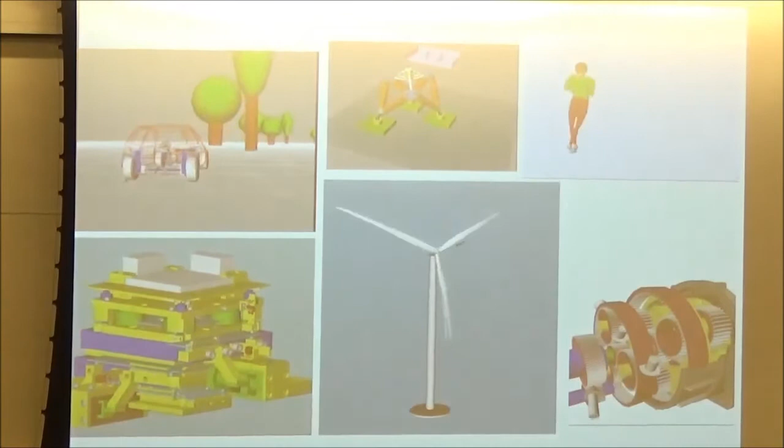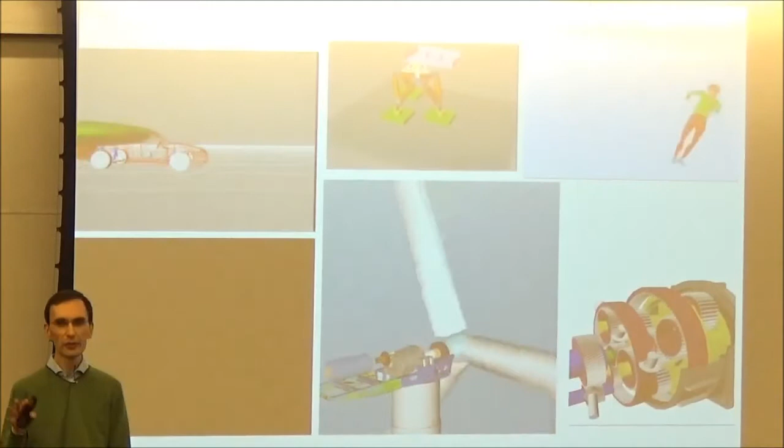Okay, and let's get started with this stuff. So essentially, just briefly about the background. So I actually started with what we call multibody dynamics. So dynamics has to do with forces and this kind of things. But if you want to do it really good, then it comes down to the very basics. And the basic is like motion, right? So it has to do with kinematics. So it turns out that even if you understand about the dynamics, which is, by the way, not easy, then still you have to do something good in kinematics.

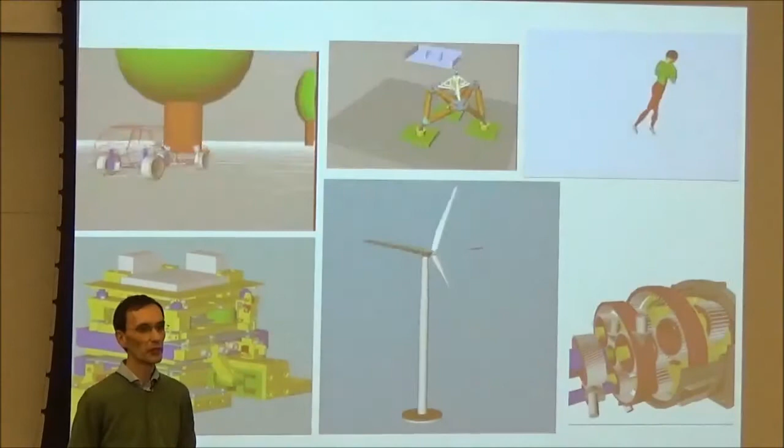So I actually came down to, converted, and I'm preaching kinematics. And it's all about things that you know. It's about rigid bodies in the simplest case, and also if you go a bit deeper into what happens in reality, then it's going to be flexible bodies. The human as a multibody system is a very good example for a system that comprises, of course, a rigid structure, but has this kind of what we call wobbling masses. Right? Wobbling masses including the fat and a bit of muscles and all this kind of thing, including the brain. So that makes it very interesting. But even if you stick with rigid body systems, it's quite a challenge.

Okay, so just a brief outline of my talk. I tried to group it into at least three main groups, which is about the Lie groups in kinematics of rigid bodies. So we are just looking at what has to do with one single rigid body. And then I would like to proceed with a chain of rigid bodies, a kinematic chain, an open kinematic chain. And then proceed going to the closed loop systems, right? So you remember this morning, I guess, there was a talk about closed loop systems, constraints, and so on.

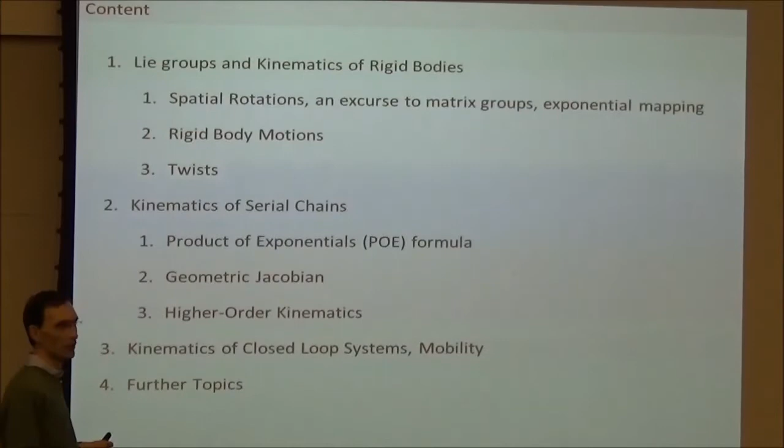The challenge actually of that talk is that if you just call it Lie groups in kinematics, this is an endless topic, of course. And I would just like to give you a bit of an introduction. And this is actually for more or less the beginner's level, or actually graduate students in the second year kind of thing. But still it is interesting.

Okay, let's start it. So this is probably the problem that Andreas was mentioning, that part of my slides get cut off. I'm not sure if we can do anything about it.

So if you look at what I'm talking about, I would like to talk about the Lie groups, and it turns out in a minute that this essentially has to do with screw theory. And I'm not sure if you, I wasn't here, if you talked about this. Actually, screws, they form an algebra, right, in a sense. So we have this kind of screw product, and this essentially means that we have a certain structure. The structure is essentially defining a Lie algebra, right?

And if you then, oh, it's getting smaller.

So if I would suggest some literature, okay, there's no way of getting it public. We have to go to the display board and change something. Okay. Good.

So if I was to propose, suggest some literature, I would of course refer to John Selig's book. That's a very nice introduction into, I don't know into what actually. He calls it Geometric Fundamentals of Robotics. It's a nice attempt to present what we need in kinematics and robotics in the framework of, I wouldn't say Lie groups, but in terms of a decent mathematical setting. And of course it has to do with Lie groups.

The other book that is getting kind of famous is the one by Murray and Sastry and Li, which is called A Mathematical Introduction to Robotic Manipulation. And they are planning actually a second edition. I'm not sure if this is going to happen. Of course, there are some interesting papers, and if you try to find the first paper that talked about Lie groups, or say Lie group formulation for kinematics of open chains, then you find, of course, the one by Bobrow and also Brockett. And the school that has to do also with that was Scott Ploen and of course Frank Park.

So, and if you look at the title, Coordinate Invariant Algorithms for the Dynamics, I think there's something more. Then you see that they are already talking about combining kinematics and dynamics. So they have been looking already at the dynamics formulation using Lie groups. Right? So we will see in a few minutes that actually Lie groups are just one way of looking at matrices, because essentially what we are looking at are matrix Lie groups. So it boils down more or less to two sets of matrices that are somehow connected by a mapping. This is the exponential mapping. So that's going to kind of give it the framework.

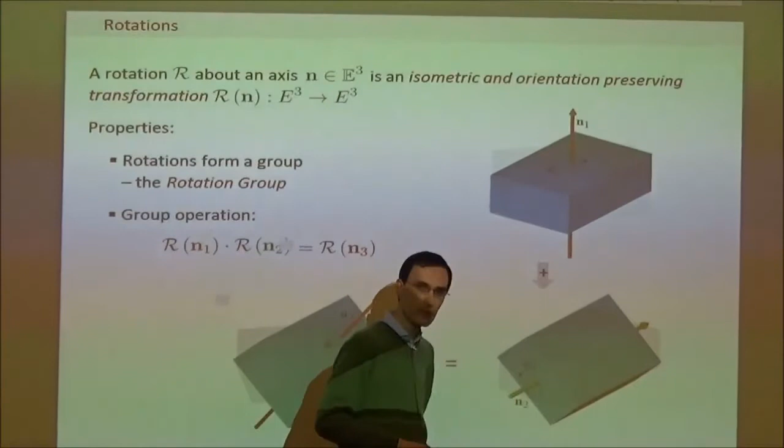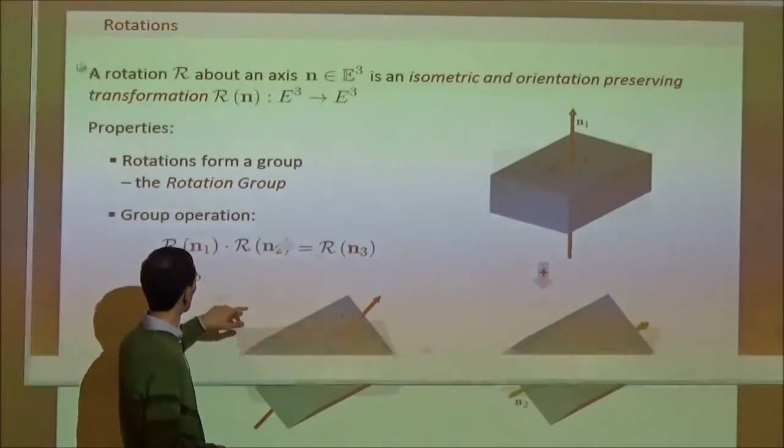Then of course I can combine this with a second angle. So I have the first rotation, I take what comes out, and then I rotate the configuration that comes out of here about a different axis, n2, and an angle phi2, and then I get a third angle and a third axis. And of course you know that there is a relation, and you can symbolically write that there is an axis n3 that gives you the same result as if you take n1 followed by n2.

What that means is that these rotations form something that is closed with respect to the application of the rotation. That means they form a group, right? Remember, a group is a set that is closed under multiplication. We have an identity and we have an inverse. So the identity rotation is of course no rotation, right? The inverse of a rotation is just the rotation about the same axis over the negative angle.

So we can try. Yeah, that's good. Well, we have 90%, that's good. Right, so we are here.

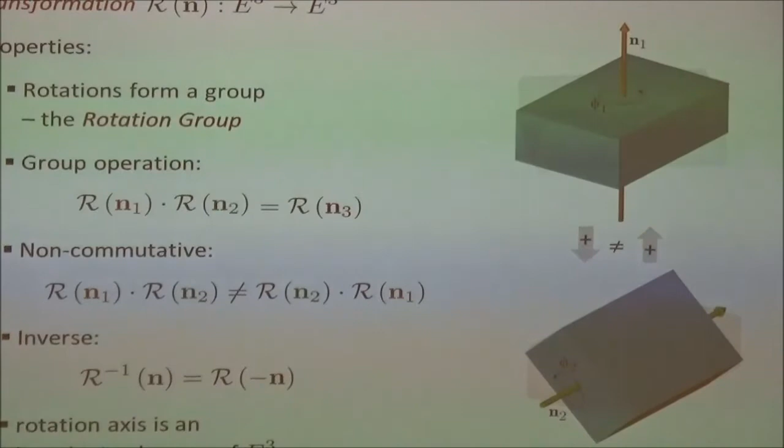But we know something more. We know that it's a group. We know, of course, that rotations do not commute. If I rotate about n1 and then about n2, it does not give you the same as if I rotate about n2 and then n1. So we have a non-commutative group. We have an inverse, of course, which is just the rotation about the negative axis. That's fine. We know something more.

We know that there is an invariant subspace. Actually, a rotation is a transformation, and it's an isometric and orientation preserving transformation of a Euclidean space. So if it is isometric, what I'm saying is, I fix 2 points on that body, right? Whatever rotation I'm performing, the distance between the 2 points of course remains, right?

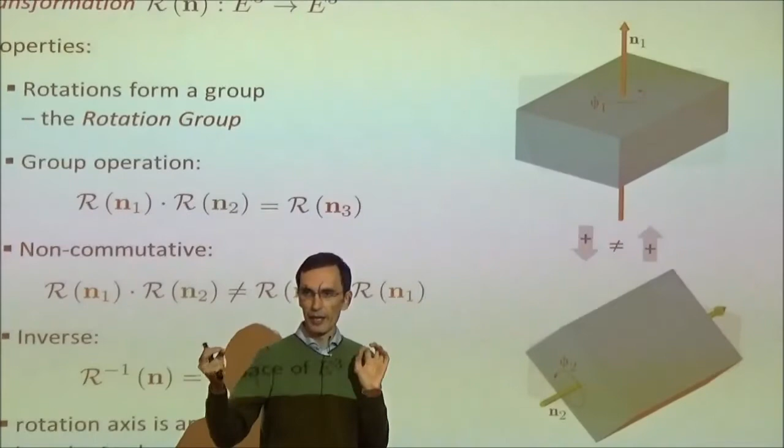This is isometric. The distance does not change. And also we have an orientation preservation property, which means that if I fix 3 points and make a right-handed coordinate frame, it stays a right-handed coordinate frame. It does not become a left-handed coordinate frame. So this is what it's all about. So, not very interesting maybe, but let's see what we can say.

We can of course represent rotations, and you know that we can use orthogonal matrices, right? Usually we call them just rotation matrices. And these are the 3 by 3 matrices with determinant +1. And because they represent rotations, they form a group, because the rotations form a group. So we have again another group, and this is what is normally called the special orthogonal group. And essentially this is one first example of a Lie group. We will see why this is a Lie group later on.

So SO(3). Remember, SO(3) is the special orthogonal group because we have an orthogonal matrix. It is special because it could be orthogonal even if the determinant were -1. It's special orthogonal because it's +1, right? So it's just the set of all the matrices that have determinant 1 and are orthogonal. And of course, this is what we know from algebra. These are rotation matrices.

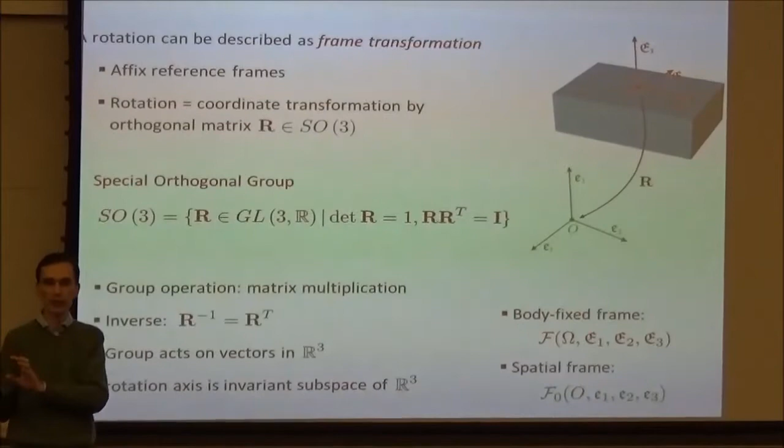The inverse is just the transpose, and of course there is an action, because these matrices act on vectors, right? You can multiply a matrix with a matrix, that's fine, so you have rotation after rotation. But you can also say I'm applying this rotation matrix to a vector, so I'm rotating the vector. So you see we have a group that acts on a vector space. This is one thing that has to do with Lie groups, because Lie groups are transformation groups. It transforms one vector into another vector. That is one thing that makes a Lie group.

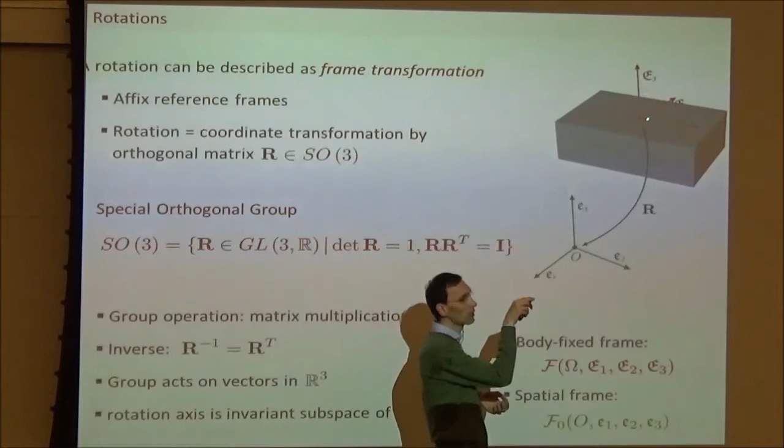And in our case, it takes coordinates from one frame into the coordinates of another frame, from the red into the green. Or the other way of saying it: we have a body-fixed point, and I express the coordinates of that body-fixed vector in the body-fixed frame, the red one. Then I'm transforming the point coordinates into the green one, maybe the space-fixed frame, just by multiplication with the rotation matrix.

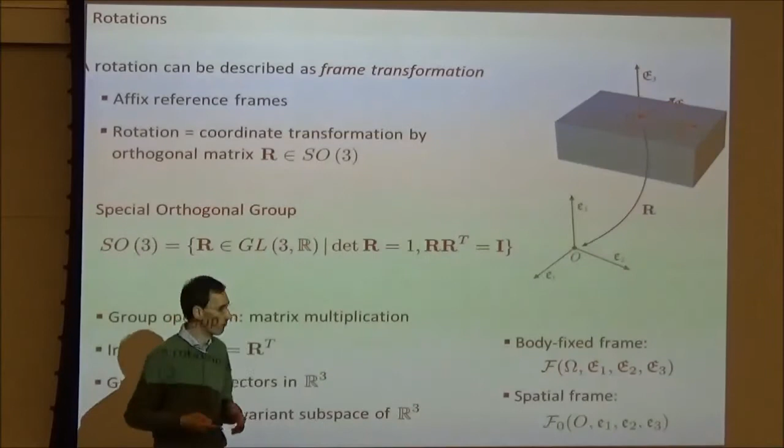But we know that there are many other ways of representing rotations, right? What about quaternions? There is what we call Hamilton quaternions. I mean, it's attributed to Hamilton, who knows. We represent this normally using the quaternion units i, j, k. And they have a certain multiplication law. If you square each of them, it's like the complex numbers, you get -1, and if you take i times j times k, you get -1. And if you combine this, you see that i times j gives k, j times k gives i, and so on.

Okay, and this defines something. Not yet a group, but at least something that is interesting. At least there is an addition, and the addition is component-wise. You add two quaternions component-wise. Then there's something called a multiplication, so you know how to combine quaternions. For whatever reason, it looks like this.

If you use the 4-vector representation, if you put all the 4 components in a vector, so you have the scalar and the vector part, then we can express the multiplication in this form. The scalar part is the inner product of the vector parts subtracted from the product of the scalar parts. And then we have this mixed part here, and this is what you know. So, fine. These are quaternions.

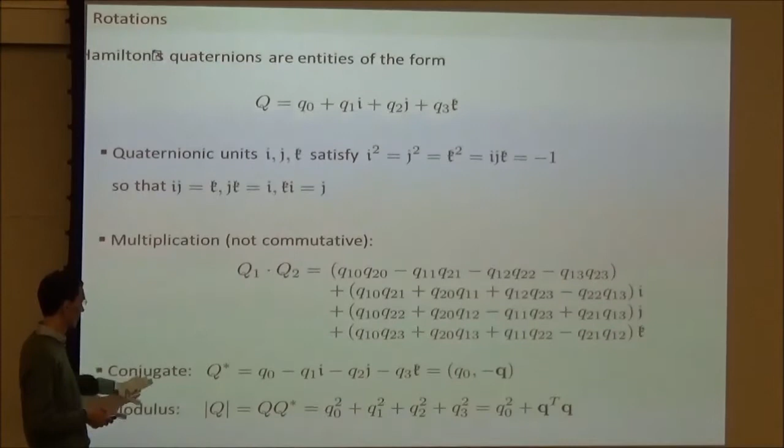And you might know that quaternions represent rotations again. So, I've said rotations form a group. If the quaternions are somehow equivalent to rotations because they describe rotations, then they should form a group, right? So there should be a group that is related to the quaternions. We have of course a conjugate, and we have the norm. So the quaternions do form a group, and this is sometimes called the unit quaternion group, symbolized with an H.

Maybe it's attributed to Hamilton. We have what? We have an identity, of course, because just the 1 is the identity, the scalar 1. Then we have inverse, taking the conjugate as an inverse. It's associative, and we have, that is important, the closure. The system is closed with respect to the multiplication, if you look at the unit quaternion, right?

So we have seen that we have then two representations of rotations. One is the special orthogonal group, that means like rotation matrices, and the other is the Hamilton quaternions. Just two representations of rotations. And this is the next step actually, what makes the Lie group, is that we can introduce some parameters, like angles and axes, right? Or Euler angles, which has 3 angles or something like that. And this means that we have a smooth parameterization of the groups. And this is what makes a Lie group.

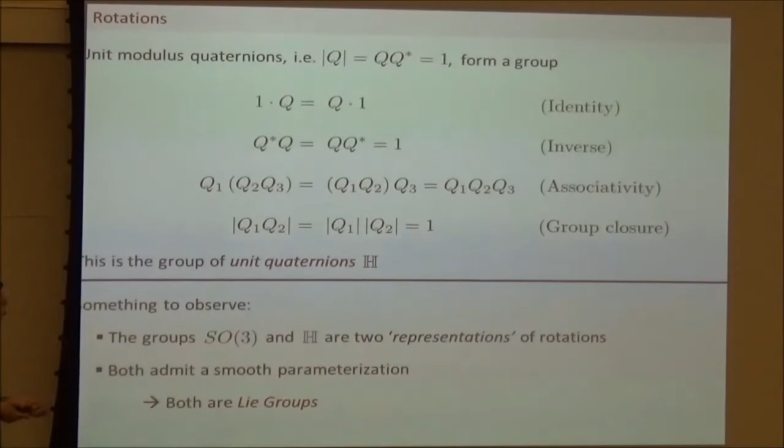Because a Lie group is a manifold. When I'm saying a manifold, it's something where it's possible to introduce smooth parameters, like angles, or like a chart on a surface, right? Like a smooth surface is a manifold. Why? Because you can introduce a chart, a local chart, and everything is fine. You have local parameters, everything is differentiable, it's smooth.

So, and now if this group is itself a manifold, so we can introduce more parameters that are continuously differentiable. And if G is a group, and if the multiplication exists, and the inverse exists, and is again smooth, then this is a Lie group. Well, this is the abstract definition. But if you look at the rotations, for example, it's clear that it's a Lie group because we can introduce parameters. The parameterization is differentiable. There's an inverse, and there's an identity, and of course we have some sort of associativity. Fine.

Are there any other good examples for Lie groups? What about the vector space Rn? If you take the n-dimensional vector space, that actually is a Lie group. Because we have a group multiplication, which in this case is just the addition of vectors. And of course the rotation group is not commutative, whereas the vector space is commutative.

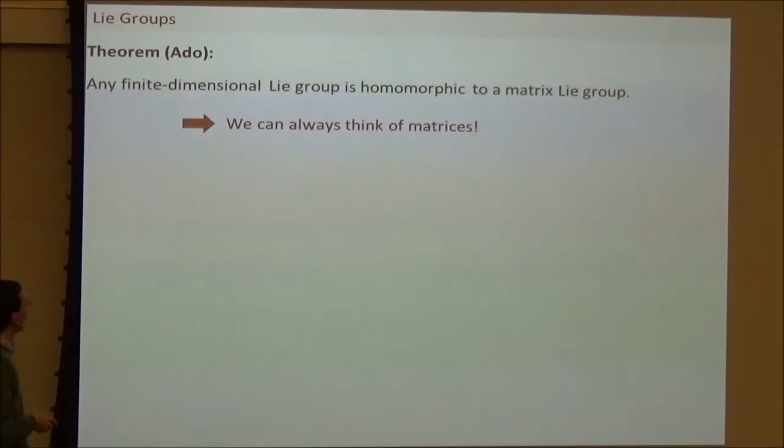And just as an example, look at Rn. The vector space Rn, with the addition, is a Lie group, as I was saying, because we have inverse, everything is very simple. But you can represent a vector in Rn as, actually, this is not correct, it should be n plus 1 matrices. So you have this n plus 1 matrix, where you have the identity matrix. So you have an n vector, right? We are talking about n vectors in Rn.

You take a vector u, components 1 to n. So you put this into this matrix, right? So you have the column vector here. Then you have the n by n identity matrix, and then you put the 1 in here. If you take two of them and multiply, u1 and u2, essentially what you get is, of course, the identity, 0, 1, and then here u1 plus u2. So it's a maybe a bit complicated way of representing the addition of two vectors. So this is one example that you can represent Rn as a matrix group, right?

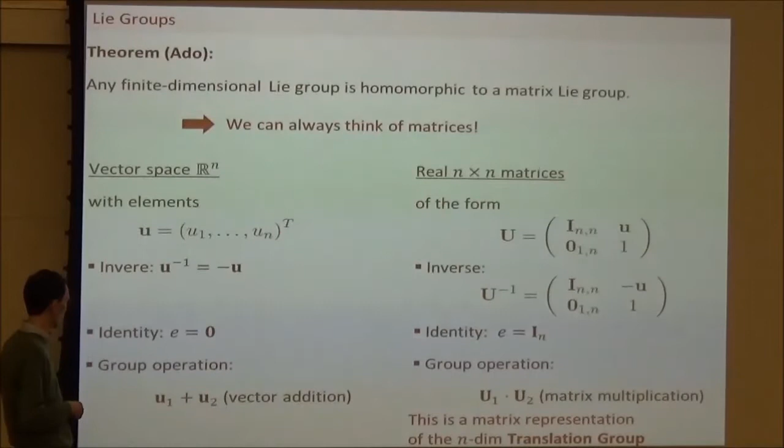Okay, good. What about now with kinematics? So far, there wasn't so much kinematics in here.

What we are going to do is to deal with the special orthogonal group first, because we are looking at rotations, right? And then we, of course, look at the full rigid body, because the rigid body motion has to do with translation and rotation, right? And not only the rotation. So we are going to look at what is normally known as homogeneous transformation groups, right?

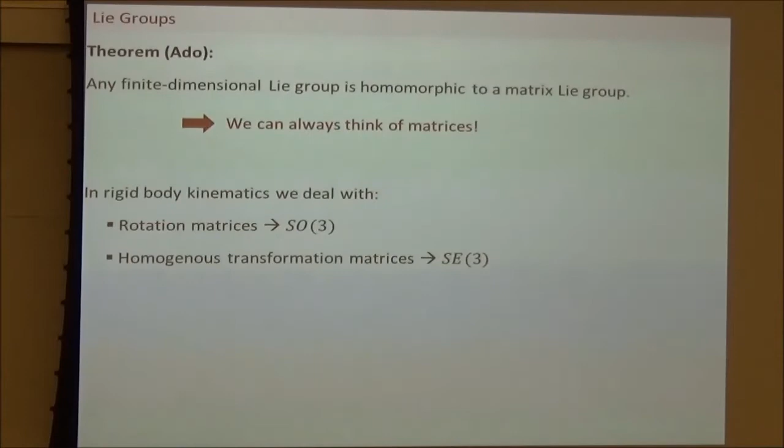Back to normal. Okay, so I was actually saying that to capture the full kinematics of rigid body, of course, we have to look at the rotation plus the translation, right? So slowly coming to a bit more of a kinematic viewpoint. Okay, let us look at what happens, for example, in a rigid body. So we have that interesting rigid body. Normally these are parallel lines. If I'm not mistaken, this is not parallel.

The projector is interesting. So let's say that we have a rigid body, and we have a fixed coordinate frame on a rigid body, right? The red one is fixed to the rigid body, and we have a space fixed. Could be space fixed? Maybe not. What is important is the relative motion, okay? So of course we have a displacement vector r, and we have a rotation matrix, capital R, right?

So what happens then, of course, if you have a fixed point on the body described in the body fixed frame, and we call the vector q. What happens then if we want to express this same point in the space fixed frame? Of course, you know what is going to happen. You have this kind of transformation, right? So you have to transform the vector q, because the vector q is represented in the body fixed frame, into the space fixed frame.

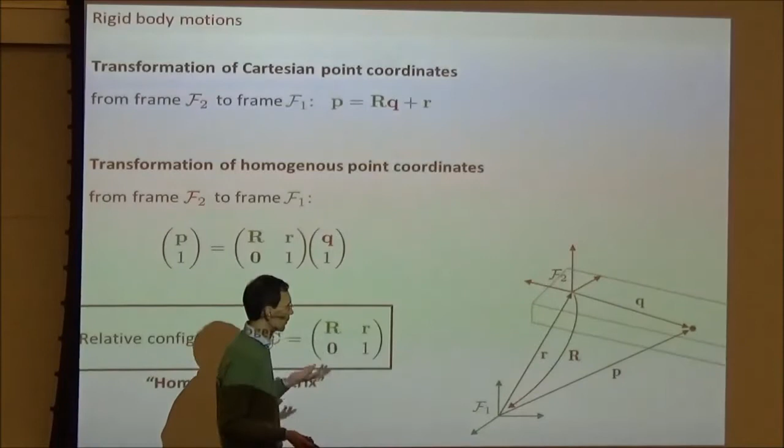And I can actually forget about the body, because kinematically a rigid body is just a frame, right? Because kinematically the rigid body is infinitely extended. Right, that's fine. Now if you multiply these matrices, of course they give you the same type of matrix. If you multiply such a matrix with another matrix, you get again a matrix that has a rotation matrix here, a 3 vector here, a 0 vector, and a 1. So that means we have at least something that is closed with respect to the multiplication.

So it's a group, again. But it's also a Lie group. Why? Because first of all we have an inverse, and the inverse looks like this. You just multiply and you see that that's correct. Then of course we know that we can introduce smooth parameters for the rotation matrix. This is what we said for the rotation matrices.

And of course we can introduce smooth parameters for the displacement by just taking the displacement itself as a coordinate. So we have a smooth parameterization, we have the inverse that is smooth, and we have closedness with respect to the multiplication. So we have again a Lie group, and this is what is normally called the special Euclidean group.

So why is it special? Well, it's special because we have the special orthogonal matrices in here. We have matrices R that are orthogonal, and they have to have determinant +1, right? And again, it's an isometric and orientation-preserving transformation of a Euclidean space, because we still have preservation of the distance, length, and also of the right-handed frame.

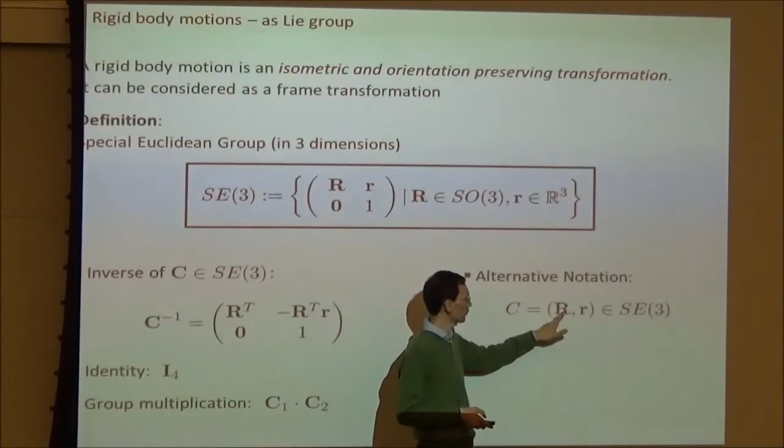I can just write, for example, the configuration of that particular frame, or the particular body, that we call C, bold letter C denoting the matrix, by just using C as the tuple of rotation matrix and position vector. So you can write the elements in this form.

Right, so what about now if I combine these frame transformations, one after the other? I have one frame transformation that transforms from F2 to F1, and I call this C12. I have a second one that transforms from F3, frame 3, to frame 2, and I call this C23. And if I combine them, I just have to multiply the matrices C12 and C23, and I get this one.

And of course you see what we get: one rotation after the other, multiplication of rotation matrices. But the position vector is a bit different. We have the first one plus the second one rotated by the first rotation matrix. That makes sense if you look at the meaning, because this one is expressed already in frame 1, whereas this one is expressed in F2, so we have to rotate. But there's a bit more interpretation behind this.

If you write the multiplication component-wise using these two tuples of the rotation matrix and the displacement vector, you see a bit of an asymmetry. The rotations get multiplied, whereas the displacements get summed up after half of it is multiplied. So what that means is that you don't have a direct product. If you had the rotations and translations as a direct product, it would just mean we multiply the first component and the second component, and that's it.

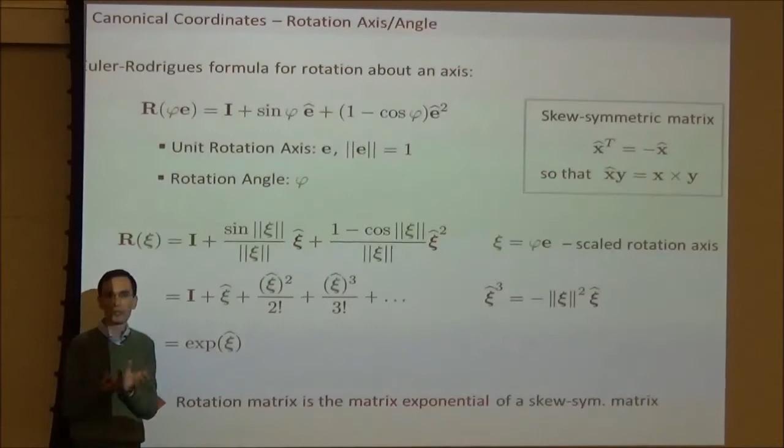Now, and this is a claim, I didn't prove it, for any rotation matrix we can find such a vector that we can express it in terms of the exponential. So we can express all these matrices in terms of exponential skew-symmetric matrices. So you see there's a one-to-one correspondence between the skew-symmetric matrices and the orthogonal matrices. And also, we can interpret these vectors that we put into the skew-symmetric matrix, a vector consisting of 3 components, as the rotation parameters. So we have 3 independent rotation parameters.

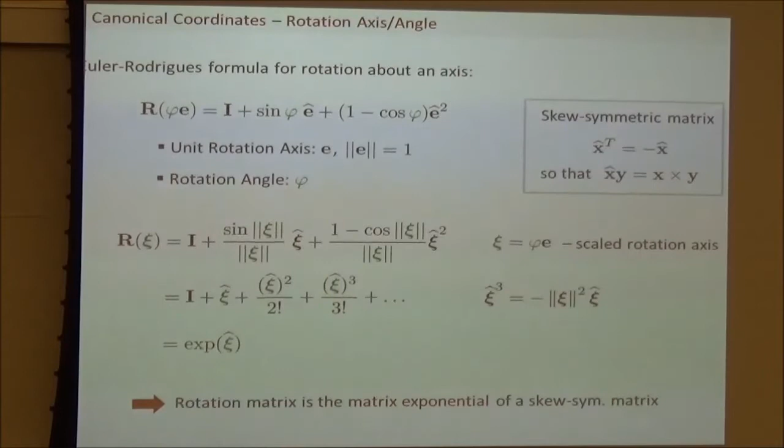And this is the parameterization and the smooth parameterization of rotations. You see, and this is what we have here. And then we call these skew-symmetric matrices, because they are somehow related to the group, right? The group has been capital SO(3), the special orthogonal group. By tradition, that set that is now called the Lie algebra, that generates a group via the exponential mapping, is just denoted with the small letters. So we have a small so(3).

So what we have is the first account of a group and the corresponding algebra. Right? So we have a Lie group and we have a Lie algebra. And the connection is the exponential mapping. Of course you can ask, what is the inverse? Yes, correct, there is a logarithm, but forget about this, it's not so important. Anyway, the so(3) in this case is just a set of skew-symmetric matrices, right? That means if you take the transpose, that is minus the matrix.

Okay, so that is something that leads us to the definition of a Lie algebra. And there are some quotes in here. This is a quote-unquote definition. It's not totally strict at the minute. A Lie algebra is just a vector space. So why am I saying vector space? Because of course these skew-symmetric matrices are a vector space, right? I can add them together. Whenever I add 2 skew-symmetric matrices, I get a skew-symmetric matrix, right? So it's a vector space.

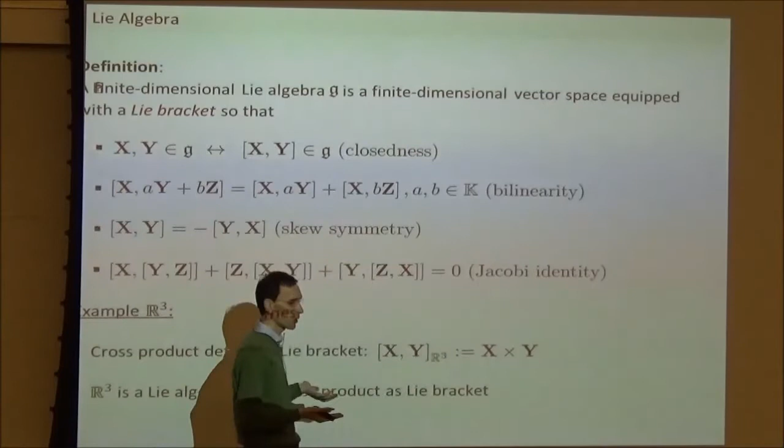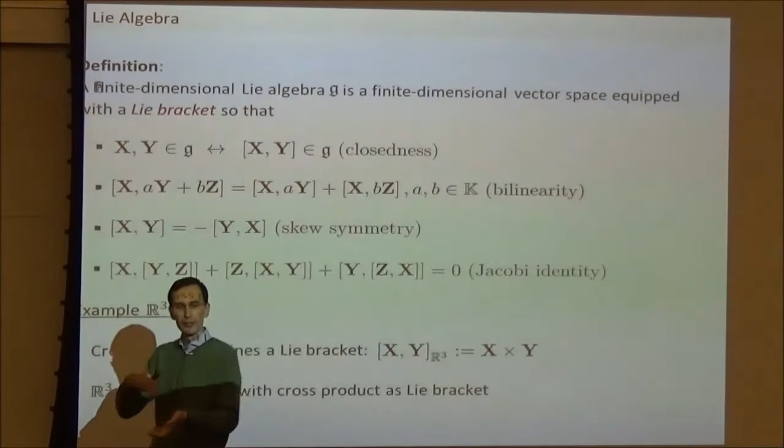And there's something that's called the Jacobi identity. So you know all this already because you know about R3, the vector space of real vectors in 3 dimensions, and you know there is a cross product. If you take 2 vectors in R3 and take the cross product, what you get is a vector in R3. So it's closed, right? It is, of course, skew-symmetric. If you take the cross product of x and y and interchange them, it gives you the negative, right? So we can say that R3 is a Lie algebra with a cross product.

And there's one thing to observe. If you take this skew-symmetric matrix, right? Start here. If you take the cross product of x and y, and you construct the skew-symmetric matrix of the vector that you get out of it, this is exactly the same as if I take the skew-symmetric matrices of x and y, minus y and x. So you see, this is a different way of representing the cross product.

But now I can go one step further, because I know that these skew-symmetric matrices themselves form a Lie algebra, which is the one that we call so(3), right? So that means there is, again, a one-to-one correspondence of the cross product and something that has to do with the skew-symmetric matrices. And this is what we call the Lie bracket in so(3). It's just defined as the matrix commutator.

So, good. I would like to come to an end here, and come to the last slide on the mathematics before I finally come to the kinematics. Just something about the matrix exponential. A matrix exponential is very simple. You take the series expansion of an exponential function and you just plug in a matrix.

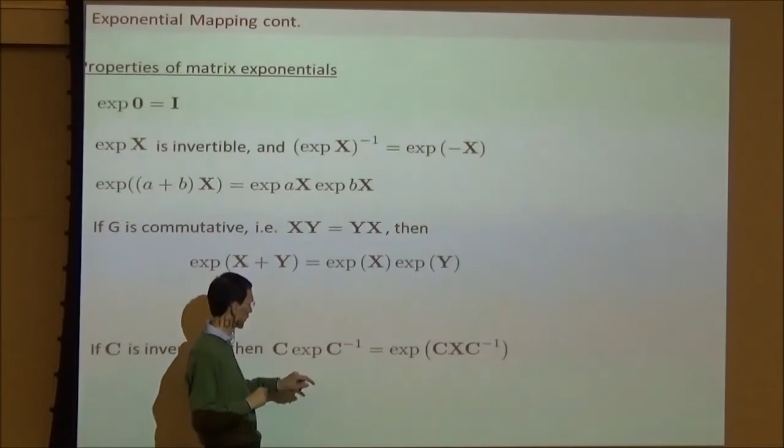What is important is this property. If you take the exponential of x and you multiply it from the left with the matrix C, which is invertible, and with the inverse of C from the right, then this is the same like taking the exponential of x left multiplied with C and right multiplied with the inverse of C. We're going to use this later.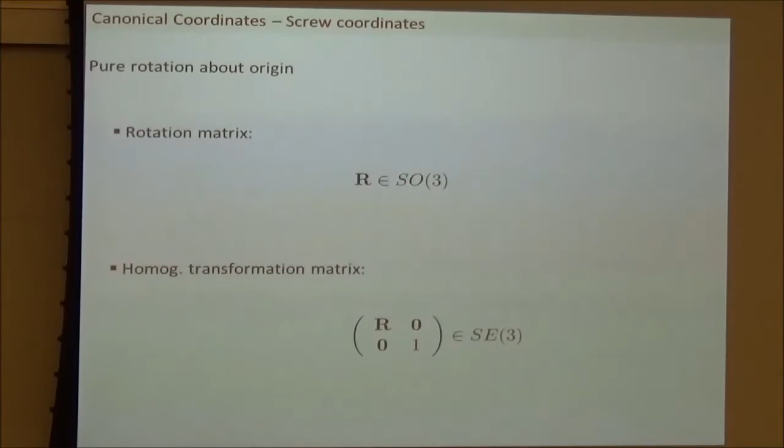Okay, so let's come back to the rotations. So I was saying that we can represent the rotation by using a rotation matrix, SO(3). Well, probably I can do the same by just saying I use my homogeneous transformation matrix, and I have no translation vector there. That gives me the pure rotation again, right? So that is probably equivalent. I make no mistake by using either one.

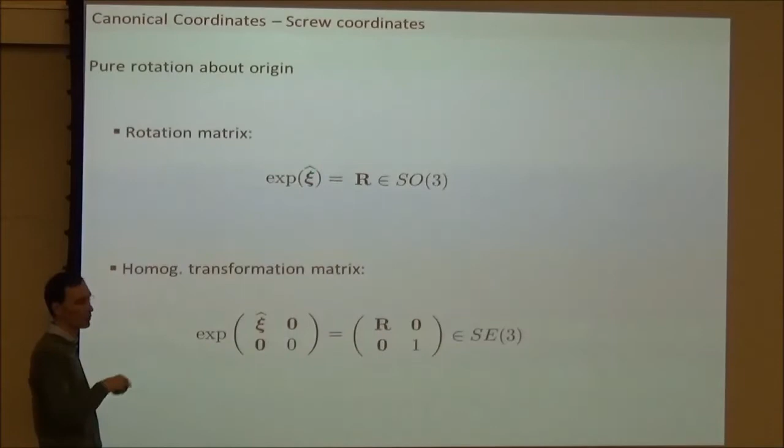So I know, that's what we said already, that I can generate this rotation matrix by using a skew-symmetric matrix. I take the exponential of it. Well, I can do the same here. If I put this matrix into my matrix exponential, the zero does not have any effect. I get actually my rotation matrix here, and everything is fine. So I take the exponential of the 4 by 4 matrix, and it only has the non-zero term here, which is the exponential of my skew-symmetric matrix.

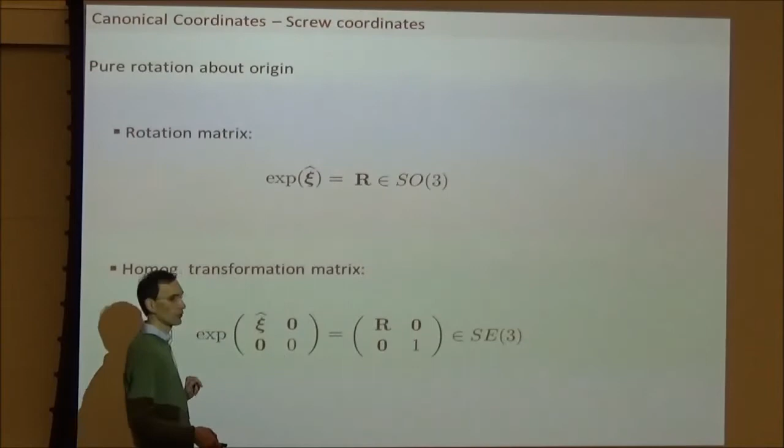Why is this important? Well, let's see how this can be generalized. We know there is a theorem that's called Chasles' theorem, or sometimes called Mozzi's theorem, which claims that any rigid body motion can be represented as a screw motion. So for any rigid body displacement, we can find an axis, a so-called screw axis, so that the rigid body motion that takes a body from the initial to the final configuration is a rotation about this screw axis and a translation along it. And this is what we call a screw motion, because it behaves like a screw.

It has a pitch. So let's see what happens if we do the screw motion, and we fix our reference frame of the body so that its origin is actually on the screw axis. This is why I was needing this kind of formulation here. So what I get, of course, is the rotation matrix, the exponential of my skew-symmetric matrix that gives me the rotation.

And I know exactly what the displacement is, because since the origin is on the screw axis, it is just the vector xi along the screw axis times the pitch h, which gives me the displacement. So this is correct. Without any further consideration, this is my screw motion that I get if I position my reference frame on the screw axis.

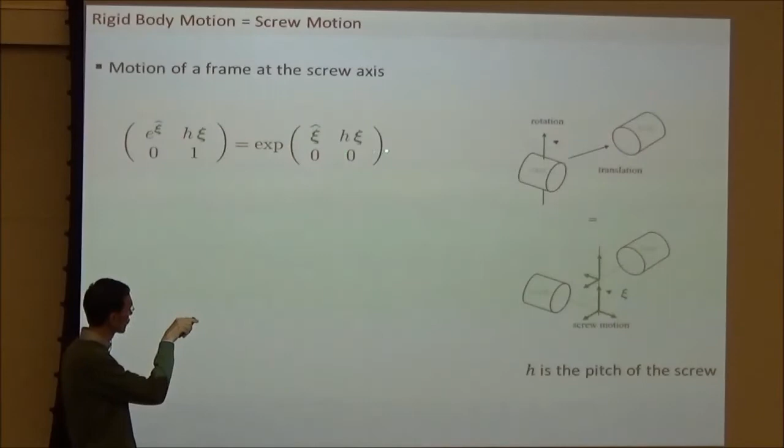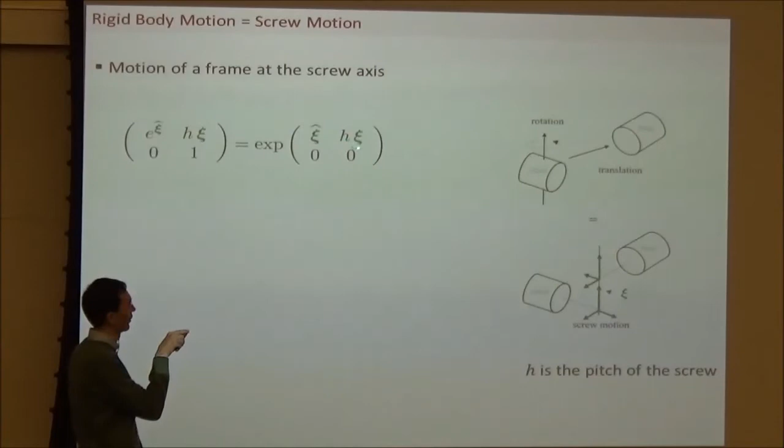And this is the same like saying I take the exponential of the matrix consisting of xi hat and h xi. Because if I use the expansion of the exponential, I get this to the power of 1, of 2, and so on, and the only thing that remains is h times xi. And here we get the full exponential. So that gives me a way of representing the screw motion as long as my reference frames are on the screw axis.

Well, what this means, look, this is just obvious how we can describe this, because what I'm doing is here we have a frame transformation from the red one, the initial one, to the one on the screw axis that I used before to describe the rigid body motion. And then I have the one that transforms back to the red one. This is the inverse, of course, and this is, of course, just a frame transformation.

And I can just multiply this, and I can then use my properties that I know. I multiply this out, and find that, of course, R times e^xi hat times R transpose, this goes in here, and the rest gives me this. And that's pretty simple. And then I use the property that I was mentioning, that if I multiply from the left with a regular matrix and with the inverse from the right side, I can raise this into the exponential, into the argument of the exponential mapping.

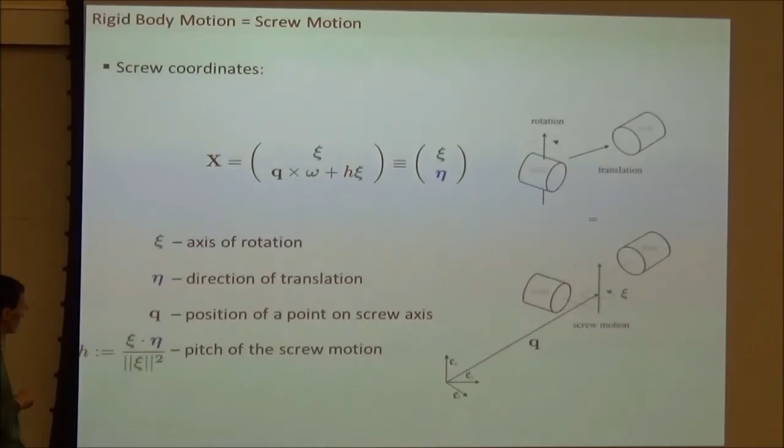And of course, how do you construct it? Just to repeat it, you have the screw motion corresponding to motion about the screw axis. You take the axis xi, and then you take a displacement vector q. The cross product goes in here. The first is the angular part, the second one is the linear part, and then you have your screw coordinates, and this goes then into the exponential.

Now we have like 3 steps at the moment. We have first of all the screw axis, then we construct this 4 by 4 matrix, this one here, that goes into the exponential mapping, right? So you might call this x hat again. So we take xi hat, and then we take this eta that we just defined as the cross product, and then this goes into the exponential mapping. Well, why not give it a name? Why don't we name all these 4 by 4 matrices with this skew-symmetric matrix and the linear vector here.

Why don't we call this se3, as we did for the rotations, for the so3? You can just say, well, this is actually a vector space, right? If you take the sum of it, you get the same sort of matrices. But this is the one that gives you the SE3 matrices, the homogeneous transformation matrices, by means of an exponential mapping, which was kind of the definition of the Lie algebra. So essentially what I'm saying is we have now the Lie algebra to the Lie group of rigid body motions, right?

I was saying that the Lie algebra has properties, and one is an operation which is called the Lie bracket. Again, in this case, the Lie bracket is just the matrix commutator. You might have seen this before. This is nothing but the screw product. I'll come back to this in a minute, where we really need it.

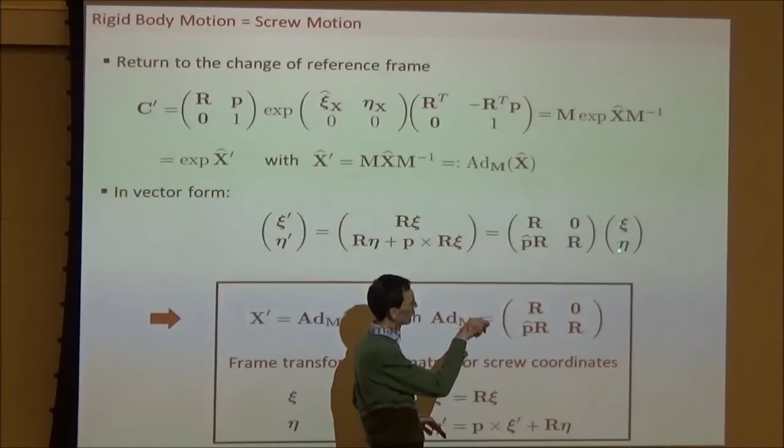And this has a certain name. Normally it is just called the frame transformation matrix. Sometimes, in flexible multibody, it's called the motion tensor. In Lie group theory it's called the adjoint mapping. Why is it adjoint mapping? Because this is an element in the group, right? But it acts on an element of the algebra. So this is like a group element acting on an algebra element, which is normally called the adjoint action or the adjoint mapping.

Now finally, to make an end to all these maybe abstract things and come to the real kinematics. Just to summarize, rigid body motion is represented by these 4 by 4 matrices, normally called homogeneous transformation matrices. We call these SE3 elements, SE3 being the special Euclidean group. So if you start with your rigid body, you have a reference frame on it, and if you perform a certain screw motion or a general motion, then this C, the SE3 element, tells you how this frame is configured with respect to the original frame.

And you can express this by assigning a screw axis, xi, at a certain displacement, and we know that the exponential mapping takes care of it, and we get C as the exponential of these screw coordinates that we can define in this way. And these screw coordinates themselves can be transformed from one frame to the other by this frame transformation matrix.

Now finally the kinematics of the serial chain. This is much more interesting. So that was one body. What about now we have a chain? We have a kinematic chain, we might have a serial manipulator, maybe a closed chain, but we'll look at an open chain in a minute. Of course we have many bodies, right? We have many links, maybe n links. Say that we look at body i or link i.

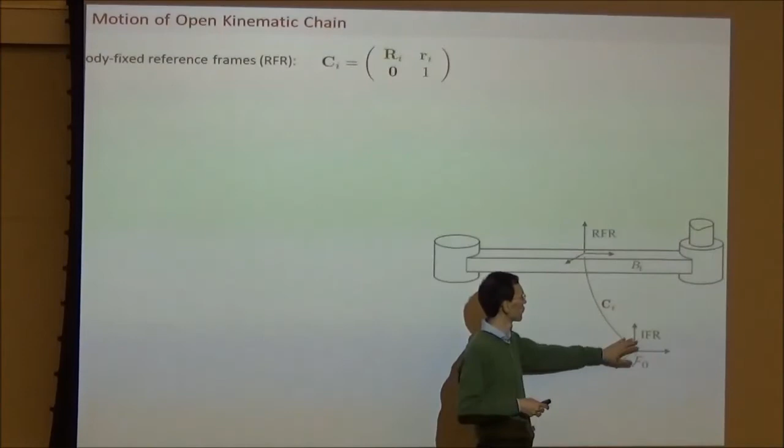So of course we can fix a reference frame. Kinematically the body, the link, is represented by a reference frame. Put a reference frame on it, then of course I have a space fixed reference frame. This is my global world fixed reference frame, with respect to which I'm able to describe the configuration of all the bodies in my chain. And I can do the same with the predecessor if I have an open chain.

So I might have link i minus 1, link i, and in between they are connected by a joint. So we just call it joint i. Joint i connects link i minus 1 with link i. Of course I have a joint angle, call it q_i.

And what can I do? Well, of course I can associate a certain screw axis. Because if I have a joint, then the joint performs a relative motion. As we know, any motion could be represented as a screw motion. So I can associate a screw axis to the joint. Apparently I use the simplest case, which is a revolute joint. There's an obvious screw axis, which is the axis of revolution.

What can I do then? Well, say that I have my Ci. So Ci is the relative configuration of the link i with respect to the space fixed frame. Indeed, I have the configuration of link i minus 1, that has the same structure, right? So I take my configuration Ci minus 1, and then I follow up with the relative configuration of the two bodies, and I have the configuration of link i.

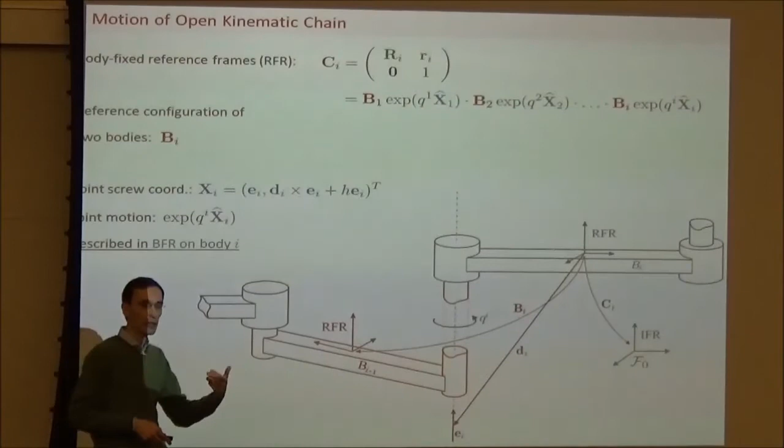So when I talked about the joint screw, there's only one characteristic here. The joint screw coordinates are then like this. This is just the displacement vector, and of course the unit axis along the joint axis. That's fine. And of course I can do this repeatedly, start from the very first link and go all the way up to my link i. I just make recursively the relative motions, and multiplying up all the relative motions of the links gives me the motion of my terminal body, Bi, right?

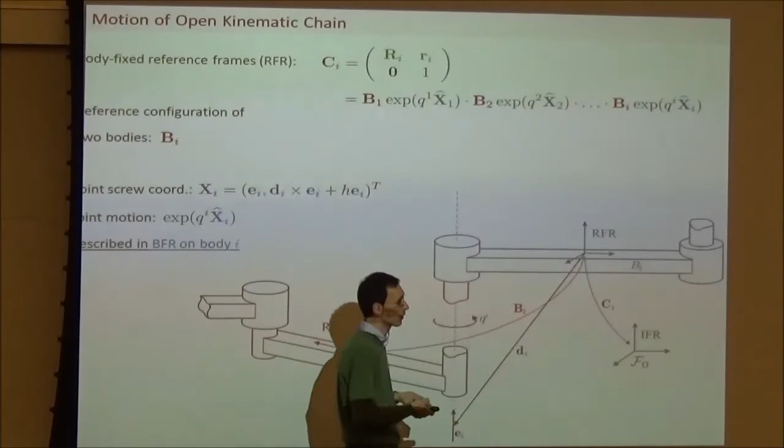And you see this is a very compact way of expressing the relative kinematics of a kinematic chain. And this is normally called the product of exponentials. That makes sense because we have a product of exponentials. Now that's not totally correct, because we still have these B's in here, right? But there is actually a way of getting rid of the B's, because we can express it in this form. And that goes by the same argument.

Instead of using this body fixed reference configuration, I forget about the reference for a minute. Just say that we start with reference 0. That means I'm considering what happens to a frame attached to a body. Start with body i. So nothing is moving except joint i. So body i is moving because joint i is moving. What is going to happen to a frame that is attached to body i, initially coinciding with the space fixed frame?

Well, it's very simple what's going to happen. It's the exponential of this screw coordinate, Yi, expressed in the space fixed frame. Because this gives you exactly the relative configuration of a frame initially coinciding with the space fixed frame, according to the joint motion, right? So if this one is moving, then we take the frame out of the initial frame. So we have that relative motion of a frame that is attached to link i, but initially coinciding with the space fixed frame.

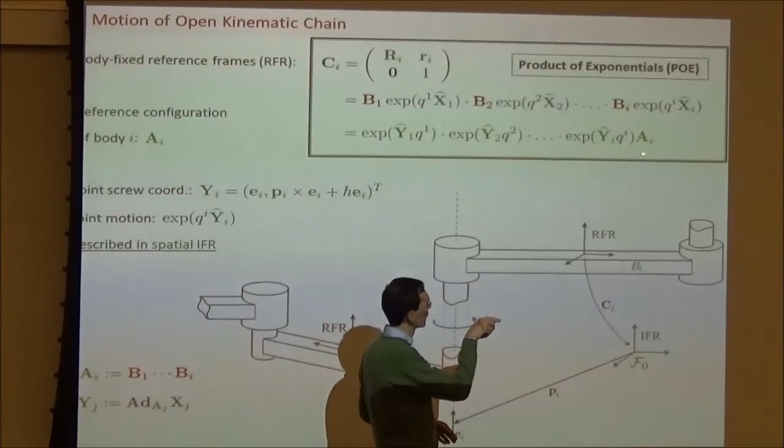And we can of course do this with all the things. The only thing that is missing is that of course normally my frame is not initially coinciding with the space fixed frame, but it's somewhere. And this is why we need the reference configuration, which we call Ai, so the absolute configuration Ai, that gives you the configuration of the link frame i for joint angles all 0.

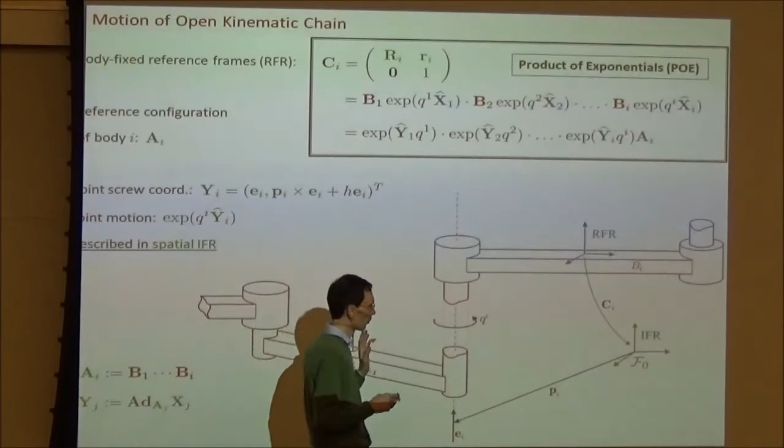The same thing, but it's even more compact. See, most of the time we're not interested in body fixed reference frames, so you can even forget about Ai. The only thing that you need here is the Y1 up to Yi. And these are the screw coordinates of the joints relative to the space fixed frame. See, this is a very compact and very easy way of representing the kinematics of an open chain. Okay, I'm repeating myself. The only thing that you need are the screw coordinates in the global reference frame.

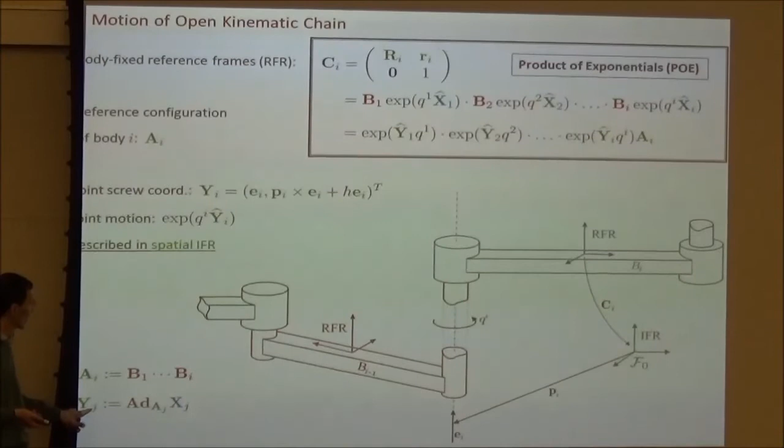And there's of course a relation between Ai and B1 up to Bi. That's clear because if you put in q equals 0, then Ci is then Ai, but here is the product of B1, B2, and so on. And this is another one which is just saying that again we have a frame transformation. We're transforming the body fixed screw coordinates into the space fixed screw coordinates. Because what Aj does, it takes from the body fixed coordinates in the initial configuration into the space fixed coordinates.

So we have actually two ways of describing the configuration of a body or link i in an open kinematic chain, either using the global reference frame, so all the joint screw coordinates are expressed in the space fixed frame. So we don't need body fixed joint frames. We only need one single reference frame. That's good. The other one, normally used in multibody dynamics, is that we have body fixed frames. Both have pros and cons. So this is nice because we only have one frame.

So why do we need this then? Well, because you know about Denavit-Hartenberg parameters, for example. Denavit-Hartenberg parameters describe your local link geometry, so they describe the B's. Number one. Number two, if you want to optimize a system kinematically, you want to tweak your geometric parameters, the link parameters, and they are encoded in the B's. Number three could be kinematic calibration.

And there are nice papers on kinematic calibration, and they use these body fixed things. What they say is, well, it's a constant, but it's a rigid body transformation; the B's are still these SE(3) matrices. Then I can represent them as an exponential. I can say that Bi could be an exponential of maybe Ui, something. So, like q times X, I could say this is maybe pi times U. What that means is that I have a parameterization of the link geometry.

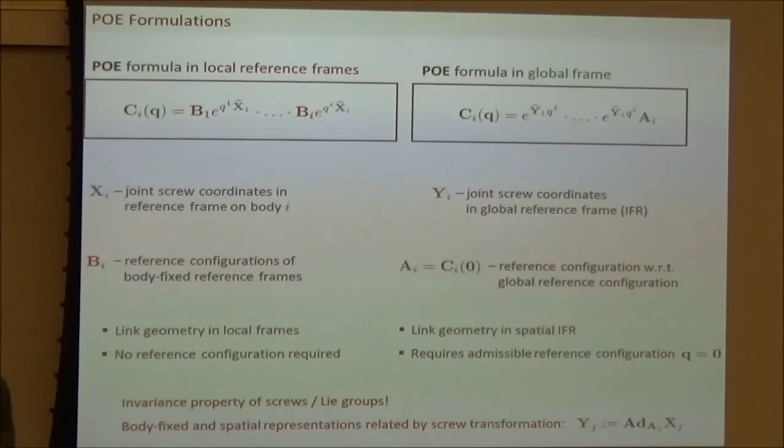And there are nice algorithms that use the exponential formulation. They call it local product of exponentials formulation for kinematic calibration. Because you only have to tune the parameters in the exponential mapping that is giving you the B's, to adapt to your measurements, if you identify the kinematics of a manipulator. There is one known application, kinematic mapping, where you have a manipulator as a serial chain, and you get the end effector configuration by the product of exponentials.

Good. I skipped this example. It's normally nice to see a practical example, but I don't have time.

Let me say something about the subgroups. I know the next presentation will talk about subgroups, but you can imagine that instead of the six-dimensional spatial transformation, there are many subgroups. For example, you have planar motions, which have three dimensions. There are spherical mechanisms, so we have spherical motions. And these correspond to subgroups, and there's a nice thing that all of these so-called lower pairs, or Reuleaux pairs, correspond to a subgroup.

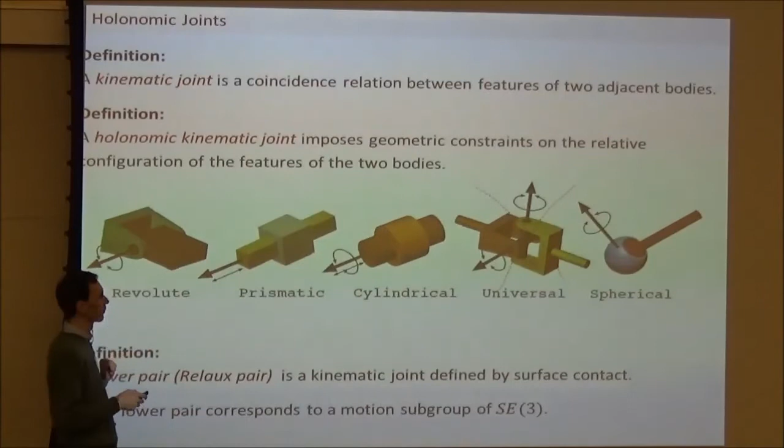Maybe later on the talk that talks about this. The universal joint, the Hooke joint, for example, is not a subgroup. Okay. What about our velocity?

Well, of course, without going to any sort of Lie groups or something like this, you can express the velocity of a link, say link K, in the chain, for example, in two ways. You can express it space fixed, or you can express it body fixed. If you use the space fixed, which I'm going to do today simply because that's what we are normally using in mechanism analysis, what is it?

The idea is to say we have a space-fixed frame, and then the velocity or the twist of link K in the chain is given by pure vector algebra. The angular part is just to take the joint velocity, q dot, times the unit vector along the axis, which gives you the omega caused by this joint. And you sum them all up, and then you get the total omega. That's fine.

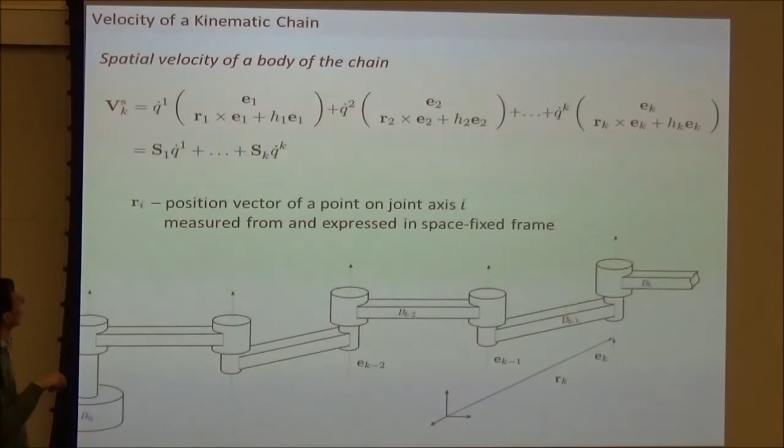The linear part is very simple. You just take the cross product of the displacement vector times ek times the time derivative of the angle. But what exactly do you get? That's a linear velocity, but what does that mean? This is the linear velocity that you measure at the origin of the space-fixed frame as if the body K would be traveling through this point. And do the same for k minus 1 and k minus 2 up to 1, and then you sum this up.

So essentially what you get is the space-fixed velocity, but the space-fixed velocity is not just taking the body-fixed velocity and transforming it into the space-fixed frame. It is the linear velocity of a point on body k that is momentarily coinciding with the origin of the space-fixed frame. It's a bit of a tricky definition, but that's what you normally use. Okay, so that's clear. There's no Lie groups, there's nothing in here.

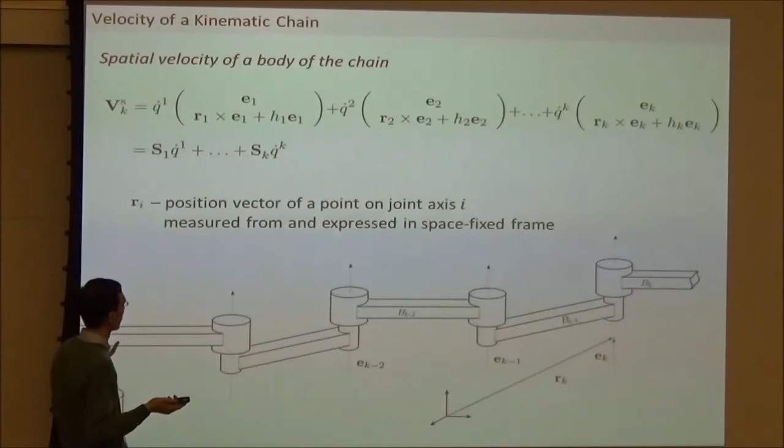What about if I have a chain? The configuration of a body K in the chain, I was saying, you can express by the product of exponentials: the exponential of Y1 times up to Yk times the reference configuration. If I take this term and put it into the definition I was just introducing for the space-fixed velocity, I have to take the time derivative.

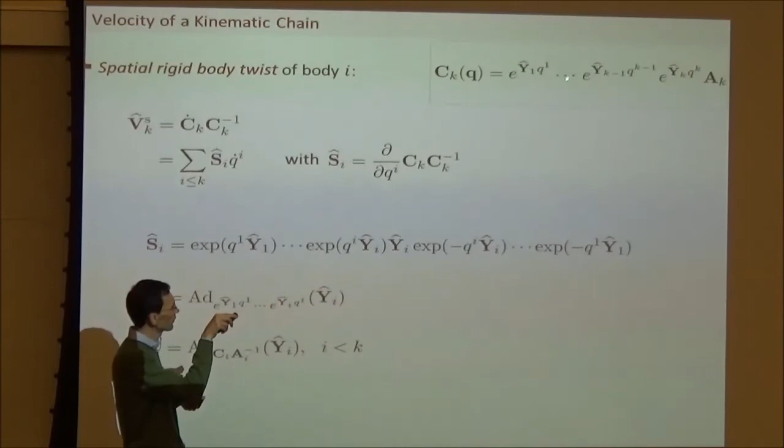Take the q dot, and then you see that somewhere in here, say that we take the partial derivative with respect to qi, somewhere in the middle. So we have the exponentials up to qi. And this is a property of the exponential: if you take the partial derivative of a matrix exponential, and in our case we have Yi qi, with respect to qi, then what do you get?

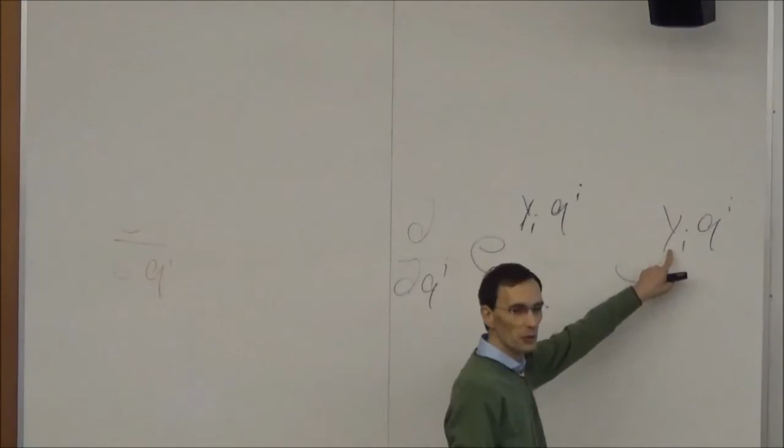Now you have to remember this is a matrix exponential. If you take the normal exponential function, it is just the exponential function times Yi, right? Now the question is, because it's a matrix, does it go to the right or to the left side? Well, it actually doesn't matter. Both are correct. So this is what goes in here, this is what we have in the middle, right?

And then we have the inverse. So we have Yi, and then of course Yi plus 1 and so on. So Yi plus 1 cancels out because we have the inverse that goes from Yk down to Y1. So the only thing left is the one from i down to 1, and we have the same here, 1 up to i. And you see that essentially this is what we have been calling before the adjoint. Remember this one when we talked about the frame transformation? This is what we call the adjoint action.

Okay, conclusion is that the partial derivative times the inverse, which I call Si now for the instantaneous screw axis of joint i, is just given by the frame transformation described by this adjoint mapping acting on the reference screw of joint i. So Yi here is the screw coordinate of joint i in the reference configuration, for joint angle equal to 0.

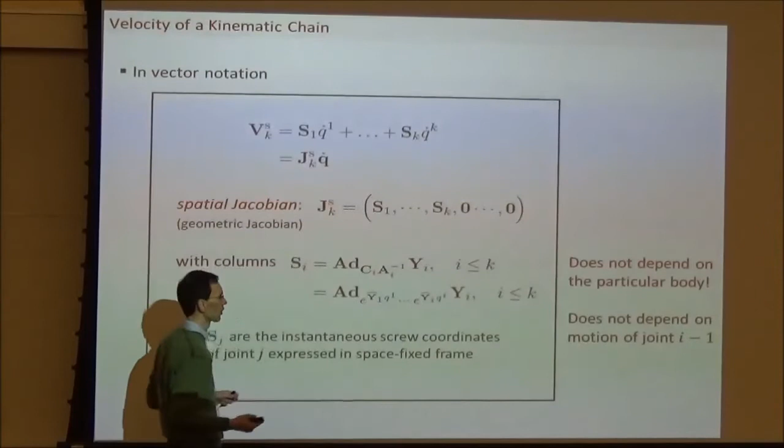See, this is the motion of the chain from body 1 up to the joint. This is the screw coordinate of joint i, and this is the chain. This describes the current motion of the chain up to joint i. So it's just describing how the joint screw coordinate is moving as the chain is moving. Okay.

Good. What about accelerations? Because we talked about velocities. Take the time derivative. What about jerks? Higher order derivatives are important, and there is a history behind this. Harvey Lipkin talked about this, also Karl Wohlhart, and a nice paper, not so well known, is by Jean Lerbet in the Journal for Applied Mathematics and Mechanics. Nice paper, I would recommend reading it.

But also, if you look at the school of the colleagues of Jose Rico, this Mexican school, if you try to read these papers, it's not easy.

They did a good job, but they tried to come up to the 4th or 5th order, 5th time derivative, right? It's getting very messy, very messy. But at the end, it turned out that there is a systematic way of doing it. There are just 2 recent papers, and I would like to give you an idea about this. This is probably not for after lunchtime, but you have it in the PDFs.

It's all there. Essentially, you start by saying, well, take V dot. So V dot takes, of course, the chain rule, right? And then we have to take J, the Jacobian time derivative. And this is a bit tricky, because of course the Jacobian consists of all these screw coordinates, SK. How do we take this time derivative of the screw coordinates? Well, again, we have to take partial derivatives.

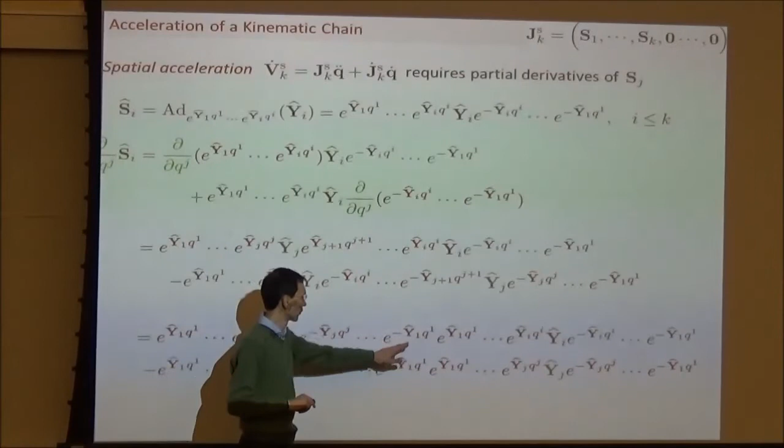But what I'm doing here is I have 1, j here, j, 1. So you can identify that what we have here is actually Sj, right? Do the same here. So we go from 1 to I, we have the I in the middle, then we have I to 1. And this is essentially Si. Do the same here. We find Si, and we find Sj. So we have seen this before, right? Because we have these se(3) matrices here. So we have one times the other minus this one times this one. That's what we call the matrix commutator.

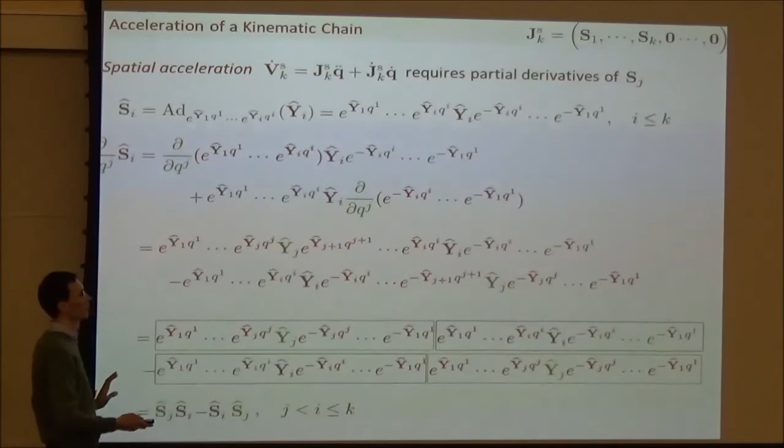So what I'm saying is that what we get here is the Lie bracket, because we said this matrix commutator was the Lie bracket in se(3), right? So the result now is that if you take the partial derivative of S, the instantaneous screw coordinate of joint I, with respect to joint J, for J less than I, it makes sense because the joint J has to be before joint I, otherwise it doesn't have an effect. Then it's just the Lie bracket of the two screw coordinates of joint I and J.

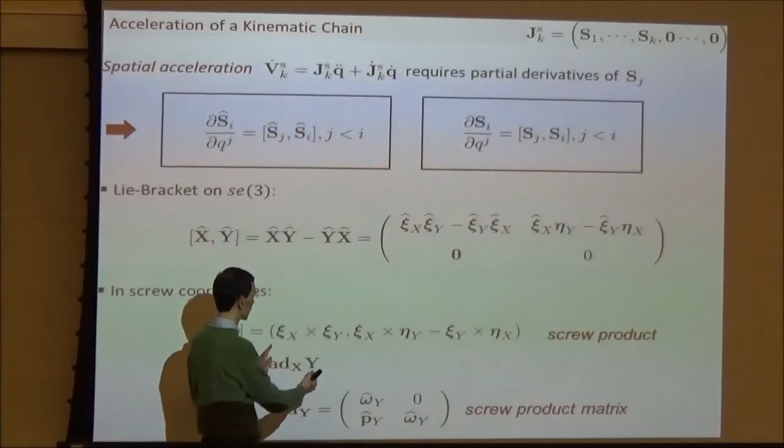And remember what we call Lie bracket. It's just what is normally called the screw product. It's just simple vector products, right? You take the vector product of the angular part, and then you have this kind of mixed vector product here. Totally simple, purely algebraic. So you get the partial derivative in terms of a very simple algebraic expression. If you formulate this in vector formulation, then instead of the cross product matrix, you have something that you could call the screw product matrix, right? So it looks like this.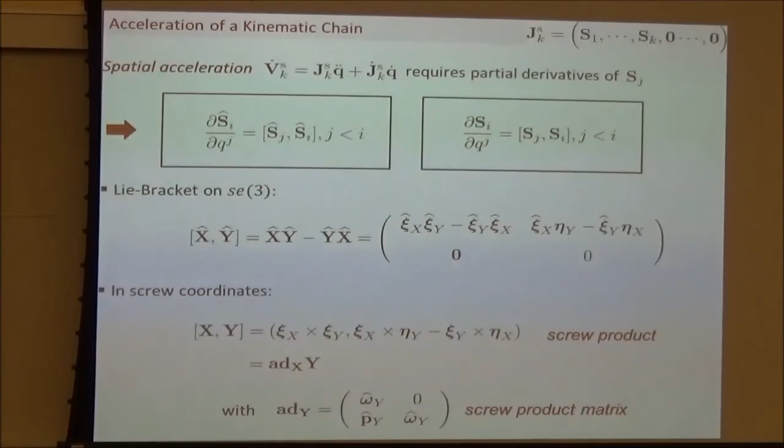So you see, this is a very interesting result that is not so new, but it's important that we understand the way in which we get it. Why? Because it allows us to come to the next order, to actually take the next time derivative.

Why is it now so easy? You see, the only thing that we have to accept is this. So we have shown this, it's fine. We know that the Lie bracket is bilinear. And of course, the derivative operator is a linear operator, right?

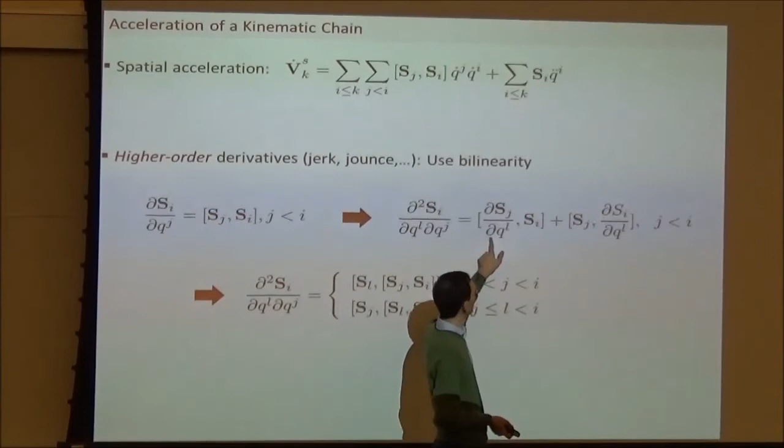So the only thing that I have to apply is, of course, just the chain rule, right? And the product rule. The Lie bracket being bilinear leads to this. And of course, this is what we know already, because you know that this is again the Lie bracket, right? So essentially, we get this kind of thing. So it's very simple. And what we get at the end is, of course, the acceleration.

See, the acceleration, if you look at this, it looks very compact, right? Now, imagine that you want to implement it, that you want to write the code, you would like to implement this in a computer. Normally, if you try to implement acceleration analysis and maybe jerks and so on, that becomes a bit messy, right? And prone to errors. If you implement this, that's totally simple.

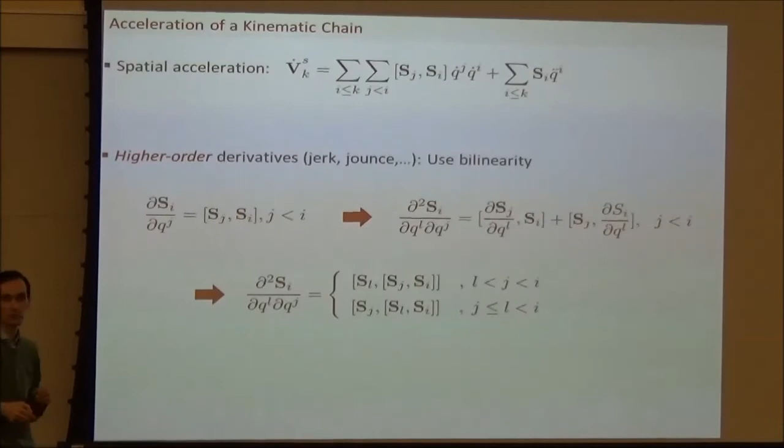And you can, of course, go further, and then you have the third order. You might need this for sensitivity analysis. For example, in dynamics, if you want to linearize your equations, then of course you have to go to the next level of partial differentiation. Right? Your motion equations are second order, so you have to go to the third order.

If you want to optimize the system, you need again partial derivatives with respect to the joint coordinates. And so you have the third order, and of course you go to whatever you want, right? Good. I think I'm almost done, but I would like to at least look at something that is important.

There's something that is sort of invariant, and this is the kind of motion space associated to a chain. So now, given that you have an open chain, how do you characterize the chain, in terms of motion? Well, we can say we have so many joints, we have so many types of joints, but how are they located? How are they arranged?

What is actually the motion that this chain can perform? Is that kind of a conservative estimate for the motion range, for the workspace, if you want to say, if you have an open serial manipulator? And this goes like this.

So we know that instantaneously, this is the vector space of, I'm not saying end-effector velocities, of the velocities of body K, right? So this is the velocity of body K in the chain. This could be the end effector of your manipulator. So the span, the vector space defined by these screw vectors, is of course the vector space of possible velocities of the body K.

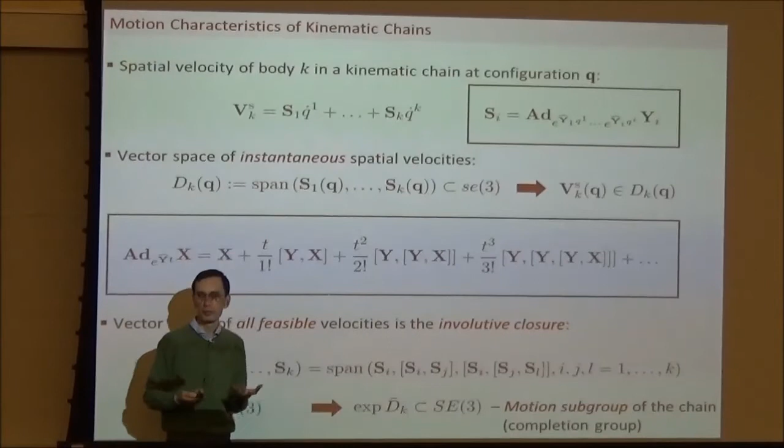And I would like to skip this maybe. I mean, the point is there are so many things to discuss, but the time is not enough. I have some examples. If you're interested, I have mathematical examples, so you can really look at the examples if you're interested in digging deeper into this. And this, of course, has to do with the workspace, right? Good.

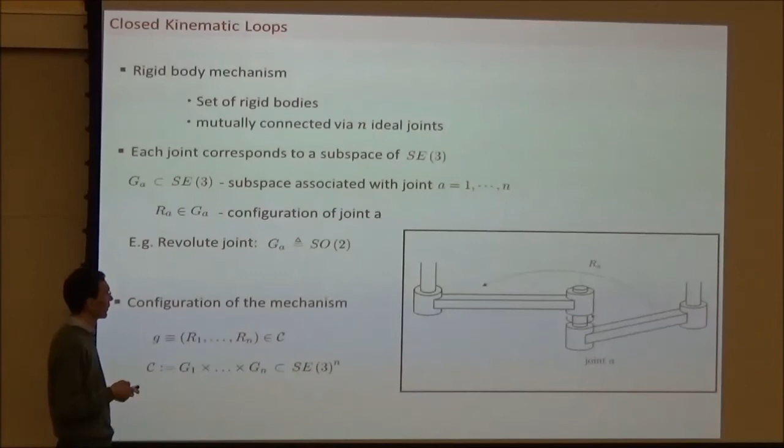Closed loop systems. I would just briefly mention closed loop systems, then I'm done. What's the difference between an open and closed loop? Well, a closed loop, of course, has to satisfy certain constraints. So what you can imagine is that we have this mapping, the product of exponentials. If you say that this is a closed loop system, then what we have to assume, if we are doing it properly, is that you have a chain consisting of link 1 up to link n.

If it's a closed loop, link 1 and link n should coincide, right? That means if I evaluate my product of exponentials formula, this should be the identity. That means the vectors of joint coordinates, joint variables like angles, that are allowed, that satisfy my loop constraints, are those so that this product of exponentials gives the identity. That kind of makes sense, I guess. And this is defining your configuration space, right?

Now, this configuration space is, in this case, an analytic variety instead of an algebraic variety, like yesterday. The only difference is that now we are not looking at polynomials, we're looking at analytic functions like sine and cosine, exponentials, and so on. But the interesting point is, what can we say about this variety? And is it possible to say something about the mobility? The mobility of a mechanism is the dimension of its configuration space, right? That's clear.

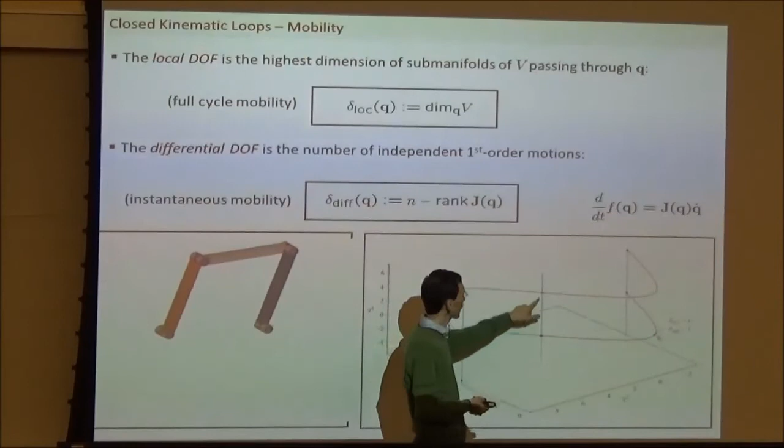Good. But of course, like the four-bar mechanism, it's one degree of freedom. So we have 4 joint angles, a 4-dimensional space, and there's a curve. The configuration space consists locally of curves in the 4-dimensional space. If you make a 3-dimensional section, you see there are curves, but they're intersecting. And these intersection points are the singularities, right?

Now, wouldn't it be nice to have a method to analyze locally what happens at the singularities, or even in regular points? And this we can do with these higher order derivatives, because using them you can approximate locally how your configuration space looks. This allows you to analyze what happens at singularities, but also to find mobility. It's a different way of finding mobility, because identifying mobility is still not an easy task. And now one question could be: what is common to all these mechanisms, or what is different?

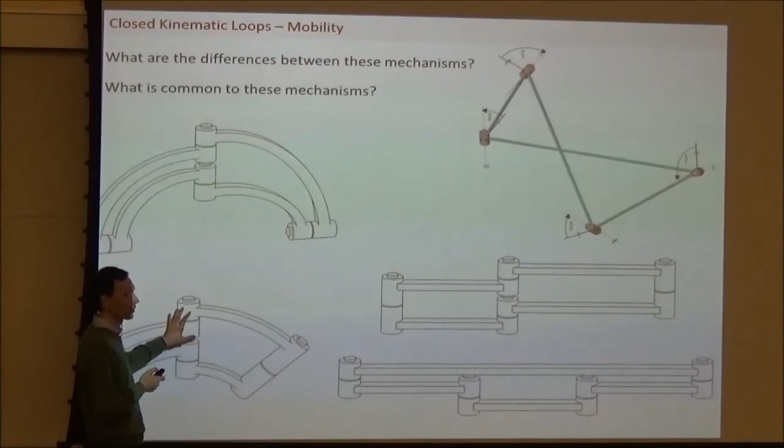Well, common to all these mechanisms is, no, maybe not this one. Forget about this one, but common to these mechanisms is they have 4 revolute joints. But maybe this is the only thing that is common. This is a Bennett mechanism, right? But there's something in common here. These are spherical mechanisms, right?

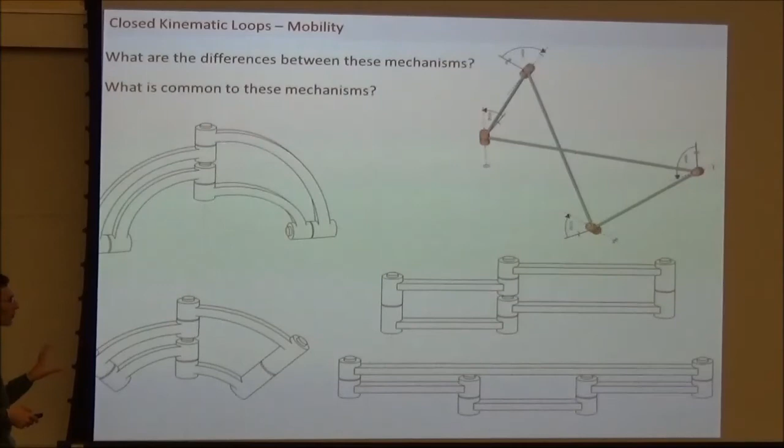They can only move. You see the joint axes are intersecting at this point, and this is a special case. They are intersecting at infinity. So they satisfy certain properties, but these have to do with the motion space actually of the chain.

So what I'm talking about is that if you look at, for example, this well-known Chebyshev-Grübler-Kutzbach formula, there is some magic number always in here. You have the 3, you have the 6. Well, there could be maybe some more. Essentially, it could be 1, 2, 3, 4, 6, not 5. Why? Because that magic number, sometimes it's called G, sometimes it's called the characteristic of the chain.

What it actually is, is the dimension of the loop space, of the motion space that we can identify by looking at the Lie brackets. Essentially, this is the dimension of the subgroup corresponding to the motion group. In this case, it's the planar motion, right? So the planar motion is 3-dimensional. The spherical motion, again, is 3-dimensional, and so on.

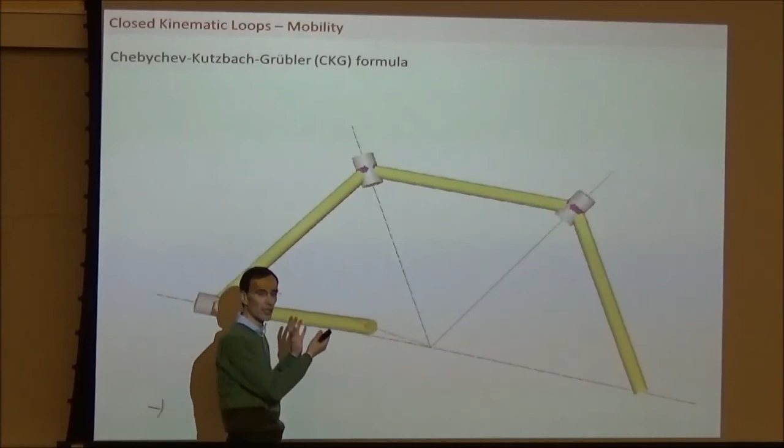But what is behind this number is essentially the motion space, the subgroup, and this is why there is no 5. Well, by the way, I have no case of 1, it doesn't make sense, but it could be. And the interesting thing is that this is, of course, inherent to the system. That means even if I open it, I still have the same motion characteristics, right? And this is because the motion space of the chain is invariant with respect to the chain itself.

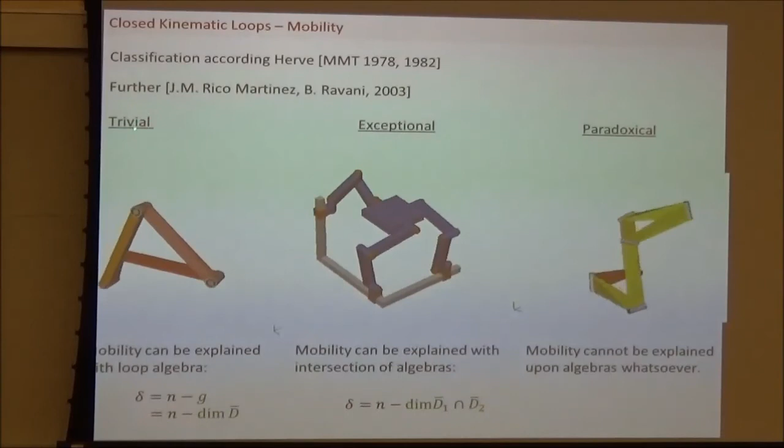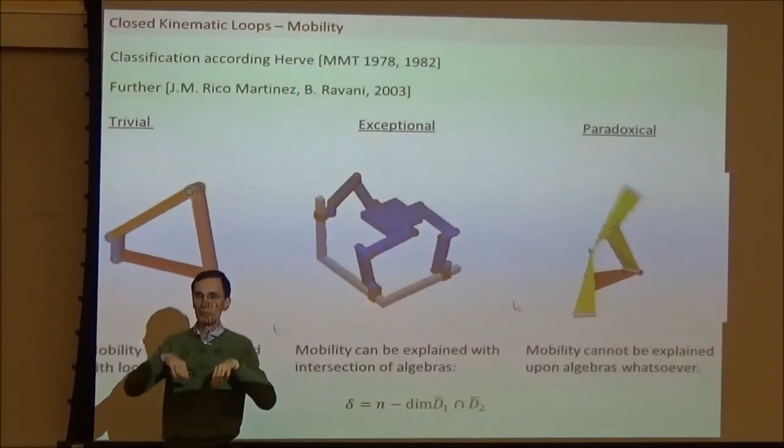So, since we can conclude the mobility by looking at the intersection, this was called exceptional, and if we cannot do anything, it's called paradoxical. Of course, this is not a good classification because it does not classify the mechanism, it just classifies the ability of looking at it. Okay, and that is almost it.

I would just say one word about this, that by looking at the Lie brackets, I mean the closed form for the higher order derivatives, we can identify the local shape, the local structure of the configuration space. Like here we have this singularity, but we still have a way of identifying that this is a bifurcation. And it's interesting that if you look at this mechanism, that is a cone. It's a 2-dimensional cone that we can identify.